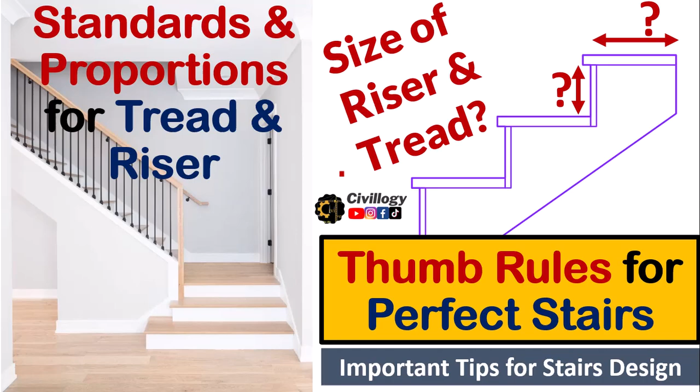Have you guys ever wondered why it is very essential for a staircase to be perfect? As we know, staircases are an essential part of our building, providing a safe and convenient way to move between the floors. But have you ever stopped to think about the importance of a well-designed staircase? So guys, in this video we are going to discuss an important factor which is responsible for the perfect design of a staircase. Yes, these are the sizes of risers and treads.

So guys, watch the complete video. In this video we are going to discuss a few thumb rules which are required for making a perfect staircase

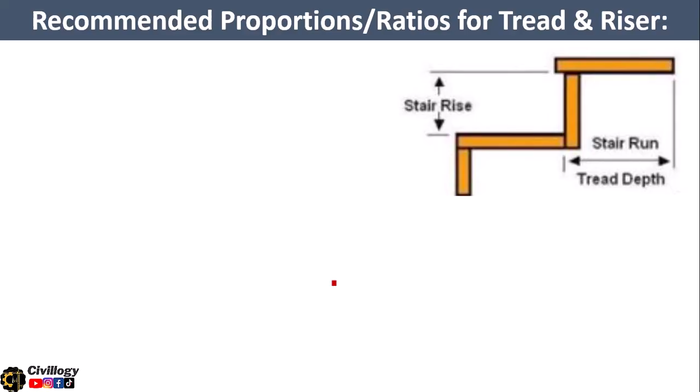A good staircase design is crucial for safety and accessibility. A well-designed staircase should have comfortable riser and tread dimensions, adequate handrail height and design, proper lighting and visibility, non-slip surfaces and secure landings. As you can see in this picture, this is a staircase built according to the standards which we are going to discuss in this video.

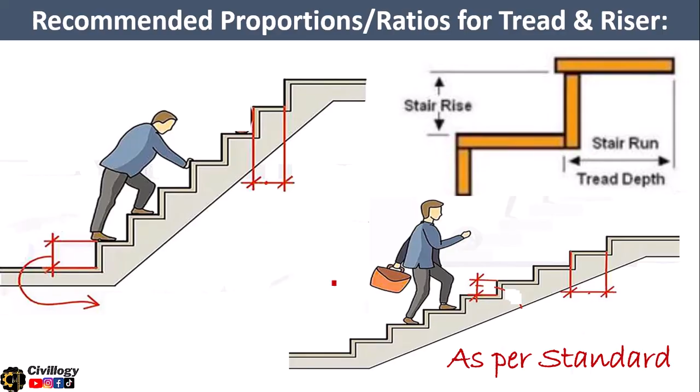Have you ever thought what will happen if the slope of the stair is too steep? Steep staircases can lead to increased risk of falls and injuries, and difficulty navigating for people with mobility issues. So this type of staircase is highly not recommended, and the staircase which is as per standard is recommended. So how will you decide the length of tread and height of risers? Let's discuss.

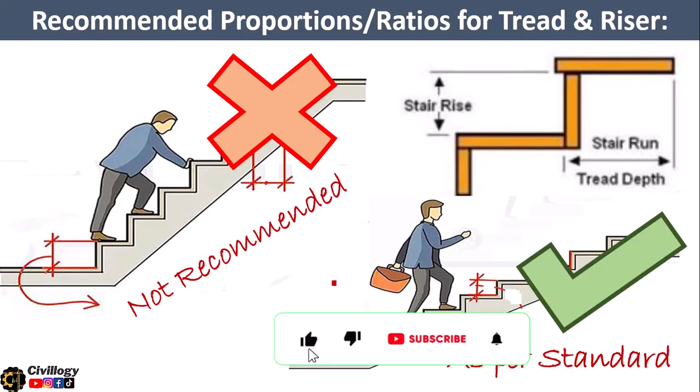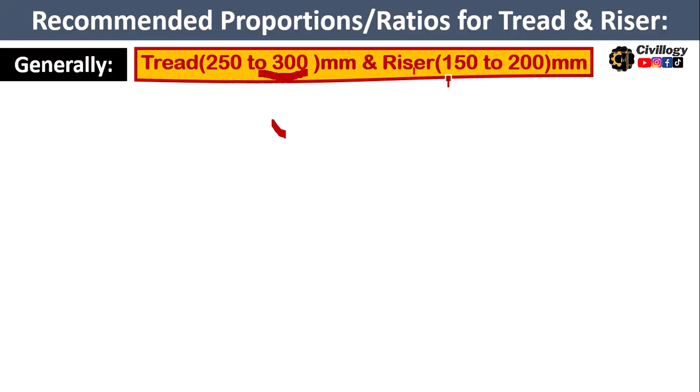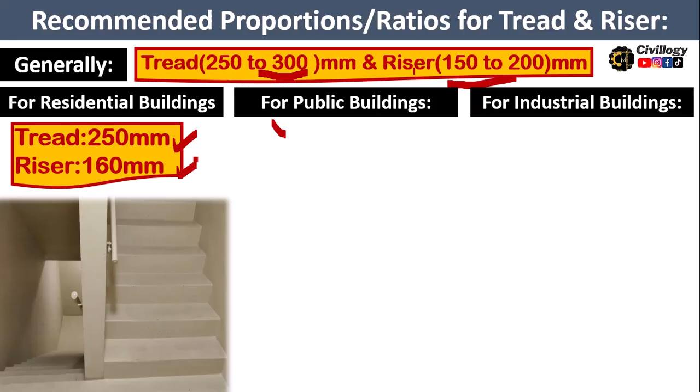Generally, the tread should be between 250 to 300 millimeters, and the height of the riser should be between 150 to 200 millimeters, and it depends upon the type of building. For a residential building, the tread should be 250 millimeters and the riser 160 millimeters. Whereas for a public building, the tread should be 300 millimeters and the riser 150 millimeters.

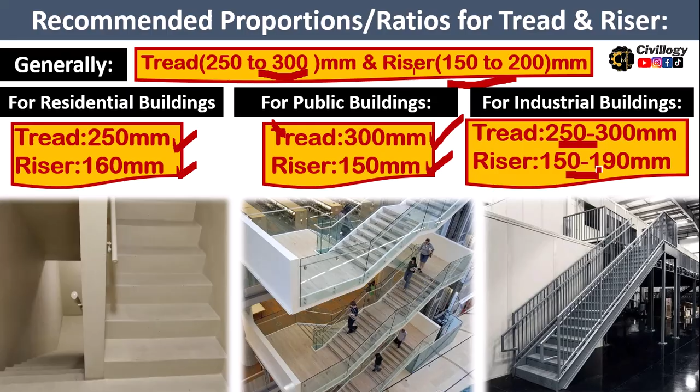Similarly, for industrial buildings, the tread should be between 250 to 300 millimeters and the riser height 150 to 190 millimeters. These are the values which should be in your mind before designing a building and allocating space for a staircase. It is very important to decide the width of tread and height of riser before designing or allocating space for a staircase in any type of building.

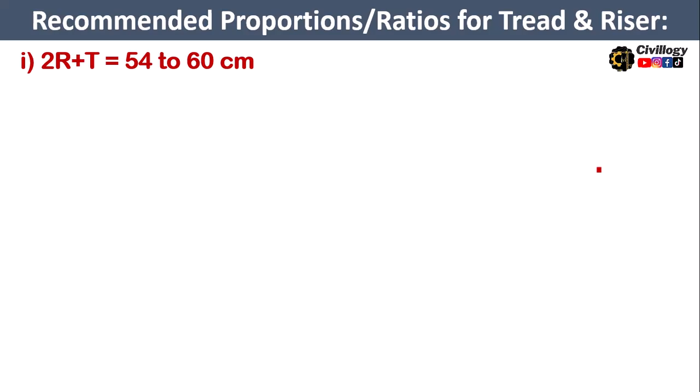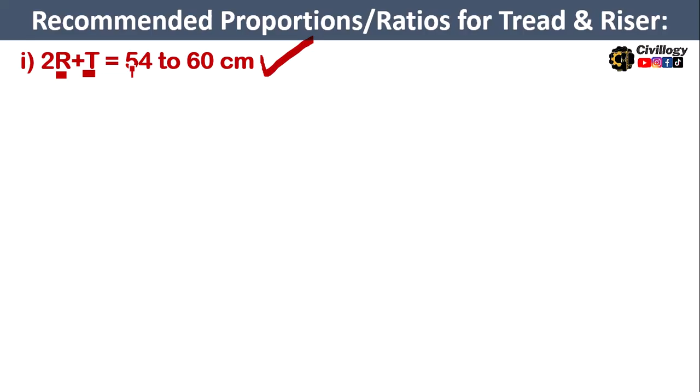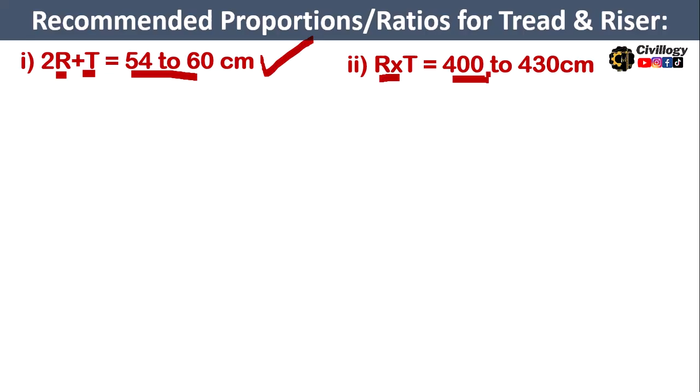Here is the thumb rule, or you can say a ratio, which will decide whether your dimensions are standard or not. The first rule is 2R + T, where R is the riser and T is the tread. This sum should be between 54 to 60 centimeters. The second thumb rule is that their product should be between 400 to 430. How will it work?

Let me show you. Suppose you have a staircase where the tread is 28 centimeters and the riser is 15 centimeters. First, we take the first rule, which says 2 times riser plus tread should lie between 54 to 60 centimeters. Putting in the values of riser and tread, we get 58 centimeters, which is well within the range of 54 to 60 centimeters. So this is good to go.

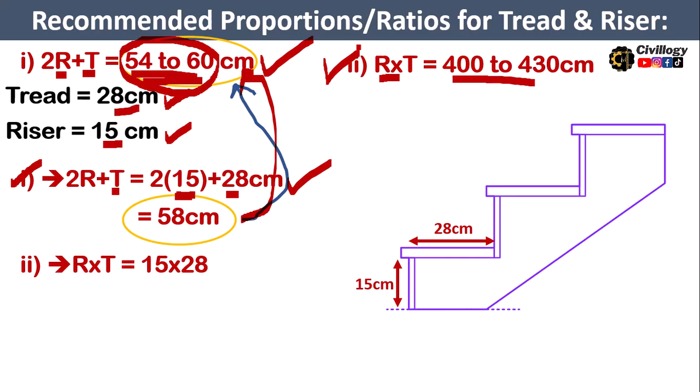Similarly, for the second thumb rule, you multiply tread and riser. If the riser is 15 and tread is 28 centimeters, the value is 420, which again lies within the range. So that's how you can decide the length of a tread and height of a riser for any type of building. So guys, that's all for today.